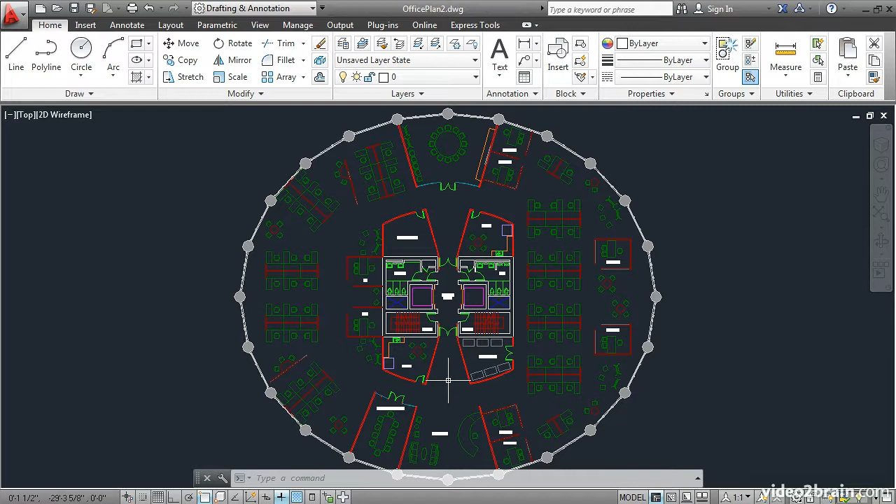Open the Office Plan 2 sample file, and then zoom into the core. Notice that the doors have a jagged appearance. This is controlled by a system variable.

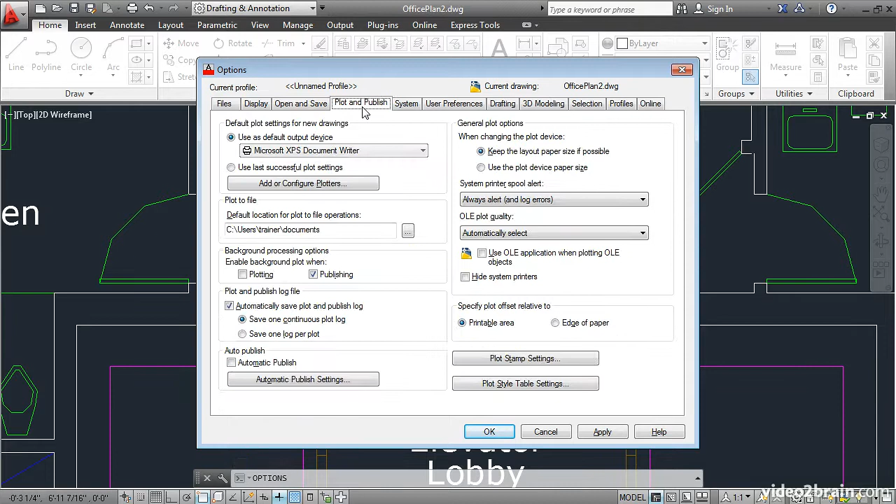Type OP Enter to access the Options command. This dialog box has many tabs which contain numerous options. Go to the Display tab, and under the Display Resolution area, there are 4 different system variables which are specific to the current drawing.

That's what this icon indicates. It says Current Drawing up here. The options without this icon are application options. Once you set them, they stay that way, no matter which drawing file you open.

In this case, I want to change the arc and circle smoothness system variable right here. By hovering over it, I can see that it's accessed directly by the ViewRes command. I could change it here, but let's go and access the ViewRes command directly so you'll understand how system variables work. Cancel out of the Options dialog and type ViewRes.

On the command line it says, do you want fast zooms? Take the default option, which is indicated in the angled brackets here. So if you press Enter, it's the same as typing yes.

Enter the circle zoom percent. Remember in the Options dialog, it was set to 100, so that's the value given in the angled brackets. I'm going to change that to 1000 and press Enter.

Immediately, the arcs have a smoother appearance because their curvature is now approximated by more numerous straight line segments, so that at this magnification it looks like a nice curve.

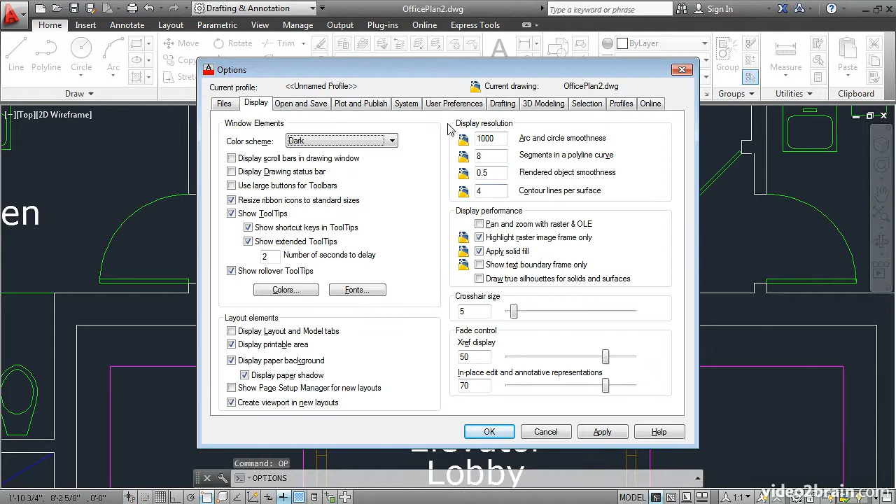Now there's a more efficient way of drawing lines which I'd like to introduce you to, and it requires a change to one of the program options. So again, type OP Enter, and this time go to the User Preferences tab and click Right-click Customization. Here we have an option to turn on time-sensitive right-click.

Let's take that option by checking the box. What this does is it allows you to right-click to signify Enter. If you do that quickly, it will mean Enter. If you take longer when you right-click by holding the right-click button down more than 250 milliseconds, then it will open the regular shortcut menu.

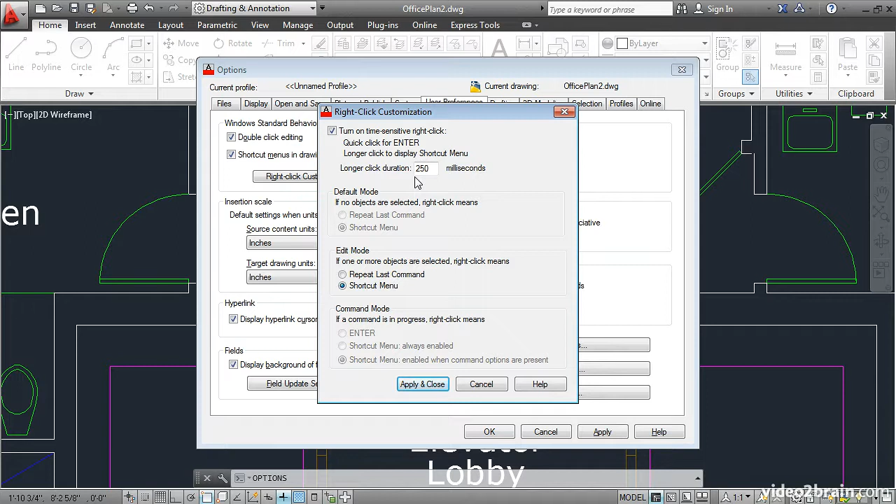Let's try this out. Apply and close, and OK. Now let's draw some more lines. Line, and I'll click a few points, and then right-click. It functioned as an Enter to end the command. I'll right-click again to repeat the line command.

So in this way, you can very rapidly draw objects by using the right-click as an alternative to the Enter or spacebar keys. If instead you right-click and take a little bit longer to do it, it opens that same shortcut menu.

Let's save this file under a different name. I'll click the Save As command here on the Quick Access toolbar, and I'll double-click in the My Files subfolder. I'll save it under the same name, Office Plan 2, but this file is different because I've drawn some lines and changed a drawing-specific option.

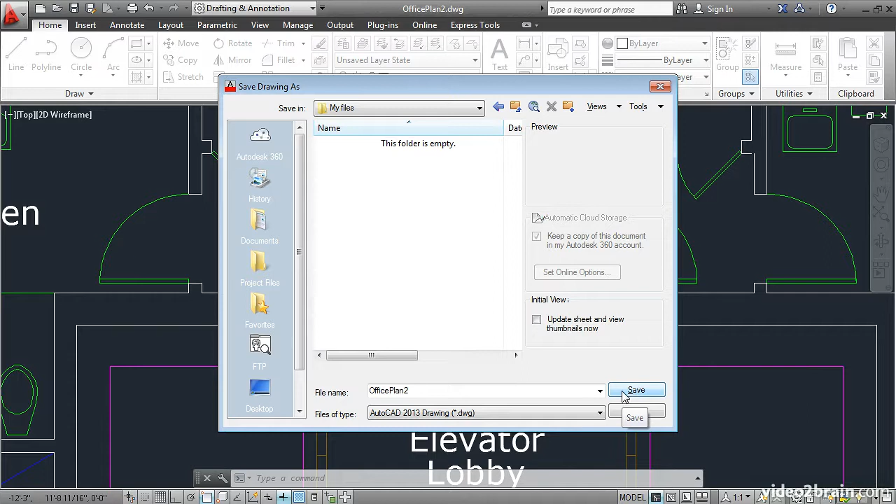Switch to your file system and go into the My Files subfolder. There's just the single file in this folder. I'll switch back to AutoCAD,

and let's make a change to it. Perhaps I'll draw another line. I'll save by clicking the icon on the Quick Access toolbar, and then switch back to the file system. Note that there's now a second file here called

officeplan2.bak. This is a backup file, and it's saved whenever you overwrite an existing file just by saving. The backup file is that drawing. It's the previous version of the drawing, and you can't open it yet.

If for some reason Office Plan 2 was corrupted or otherwise deleted, you could simply rename officeplan2.bak to officeplan2.dwg, and then you could open it.

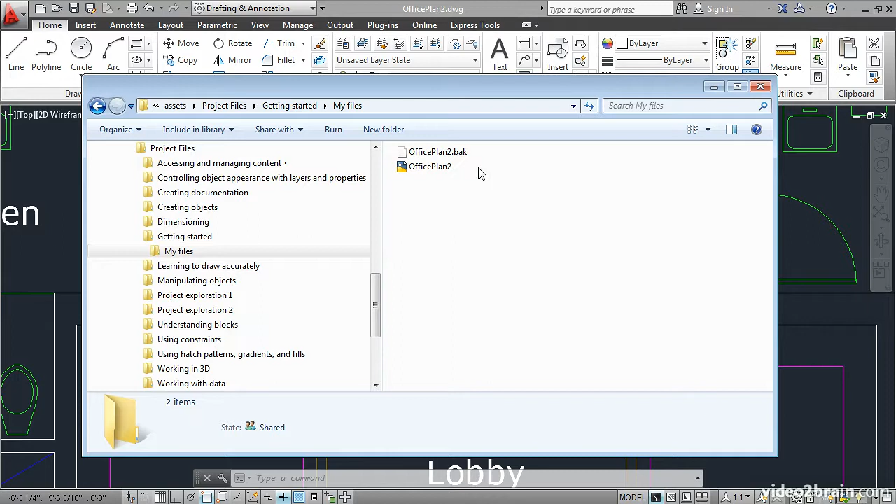Not everyone likes this functionality where you have a separate backup file, because it takes twice the time to save, and it takes twice the space on your server to save your files. So you can turn off this feature with a system variable. I'll switch back to AutoCAD and type isavebak and press enter.

Here we can change its value. This is an example of a switch. It's on when it's set to 1, and it's off when it's set to 0. I'll type 0 enter to turn it off. Now AutoCAD will no longer save backup files.

That's true no matter which drawing file I open, because that change is an application-specific setting. You've learned how to configure a few options, and now understand how both drawing-specific and program-wide preferences are configured.